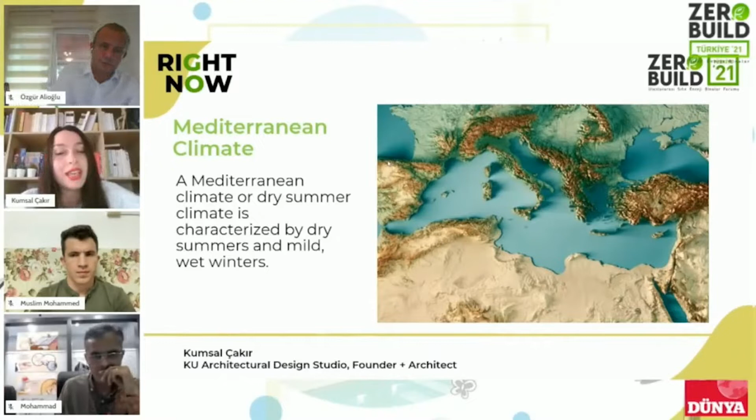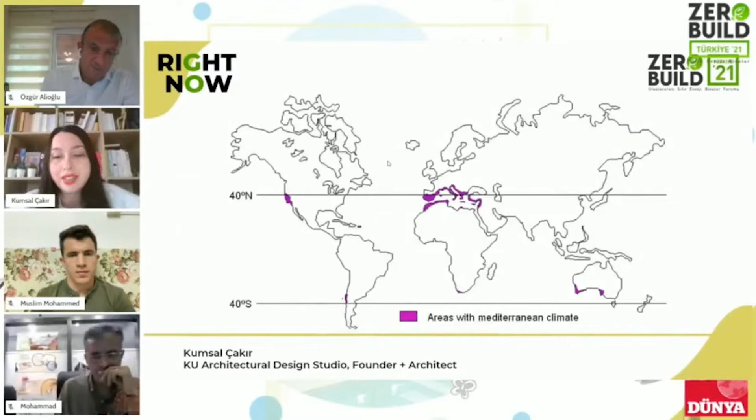Mediterranean climate is characterized by dry summers and mild wet winters. As you can see on the map in the presentation, the Mediterranean climate is located in a limited area compared to the entire world land mass. My first passive house project is ERK House, which is located in Izmir in the Mediterranean climate.

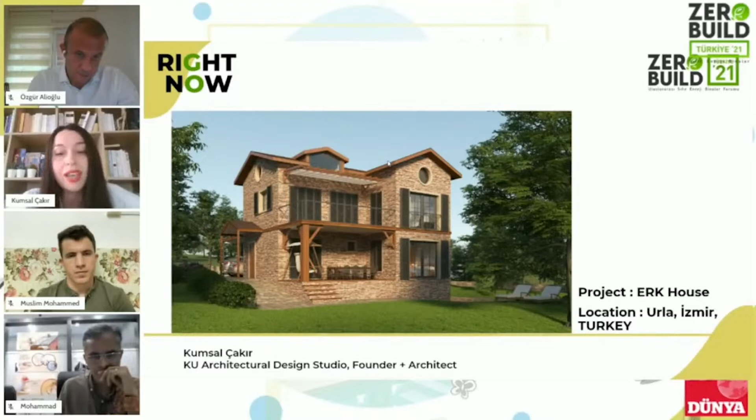It is one of the first projects built as a passive house in Turkey. The ERK House project, in which a family of 5 will live, was actually a project with very minimal needs. You can see the floor plans in the presentation. We have a very compact and practical plan. However, our difference from many passive house projects was meeting the passive house criteria in summer conditions.

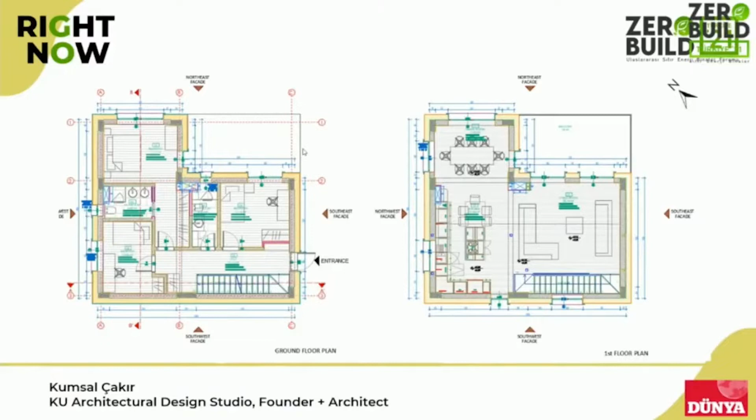I think the Mediterranean climate is one of the most pleasant and non-challenging regions to live in, at least in my personal opinion. Common practice is to try to provide passive house criteria for winter conditions in cold climates, but we made an effort to provide passive house criteria for summer conditions.

As you can see in the presentation, there is a verification segment on the homepage of PHPP, the Passive House Planning Package, which we use in passive house planning. On this page you can follow whether the necessary conditions for passive house are met, and space cooling is optional for passive house, which describes summer conditions. However, if you really want to do environmentally sensitive design in a region such as the Mediterranean climate, it can't be optional, because it's really easy to provide the values required for winter conditions in this region.

But unlike common projects, we made an effort to meet the criteria for summer conditions.

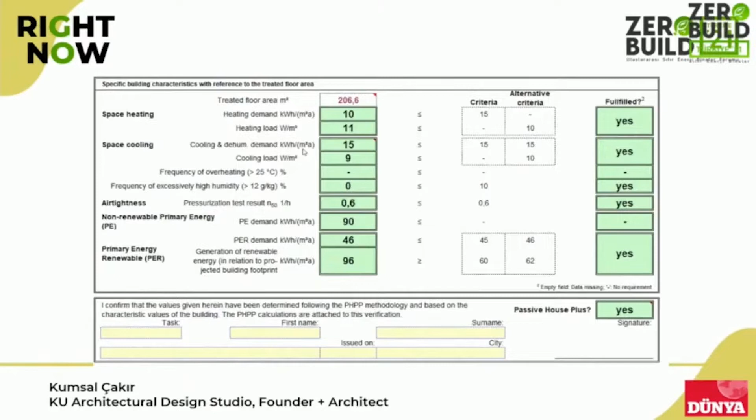The fact that our project is one of the first to be certified in Turkey, and that it's located in the Mediterranean climate, led us to new discoveries about some design decisions. Heat gain in summer and humidity became one of the most important issues for ensuring thermal comfort of the project.

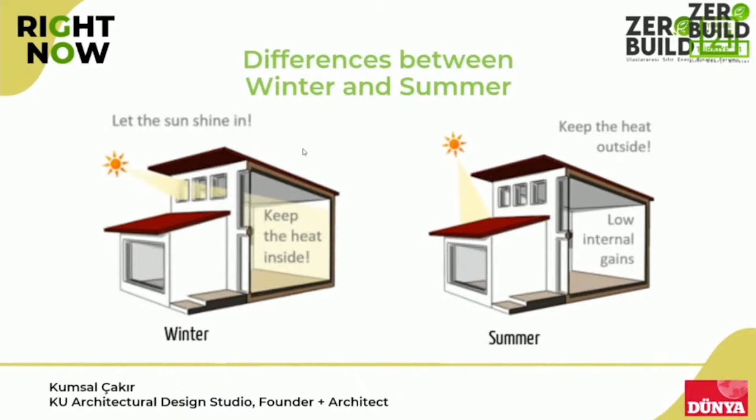For example, even if we wanted to open a skylight in the roof, the calculations we made didn't allow it. We could only make a skylight about 1 square meter, so we decided we didn't need to break the insulation for this. Apart from that, the passive house system didn't limit us in terms of design. This was just an extreme example that really surprised me, about the effect of the roof window.

Although we are in the Mediterranean climate, we applied the 5 basic principles of the passive house system in our project. I think it's been talked about too much in sessions, but let me tell again the 5 basic principles of passive house. First is a very high level of insulation.

We used 24 centimeters of EPS on the walls, but 5 centimeters of XPS on the basement floor, because we need to lose heat from the basement. Of course, we use extremely high performance windows with insulated frames, and we supply an airtight building envelope. We have thermal-bridge-free design, and a mechanical ventilation system with highly efficient heat recovery.

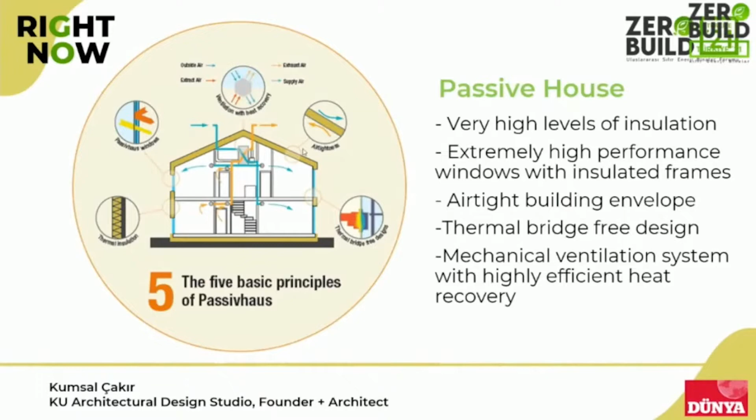While doing our work, we tried to compare all components in terms of price and performance. For this, having a program like PHPP made our work much easier. We didn't act by heart on any material.

Of course, we faced some difficulties in the process. Although passive house is a very clear and simple system, we encountered some problems due to unknowns of the system in newly implemented regions such as Turkey. When we communicated with subcontractors who didn't know about the passive house system, we had difficulty being understood when giving information.

Unfortunately, we received a lot of criticism about why we are dealing with such a thing, especially whether it's worth the effort for a single house. I think this is one of the most challenging parts of the project. The lack of certified local products and our limited options were also factors affecting the process.

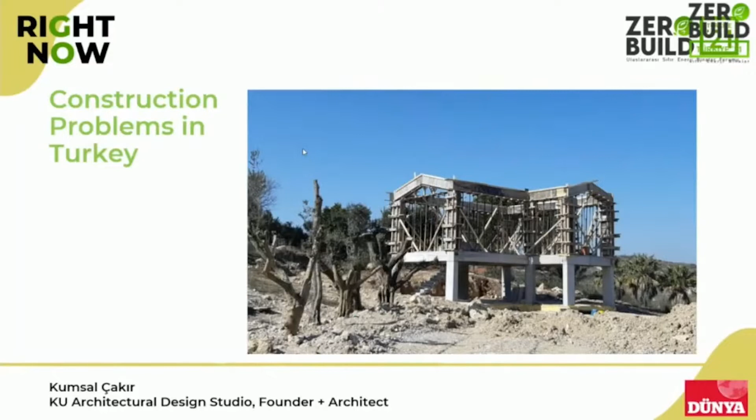We had some misfortunes in implementation here. The fact that it was one of the first projects in Turkey, and that we wanted to test every material, meant we had a hard time getting enough support from the contractor during the process. However, we continued our work even if the process took a little longer than we expected.

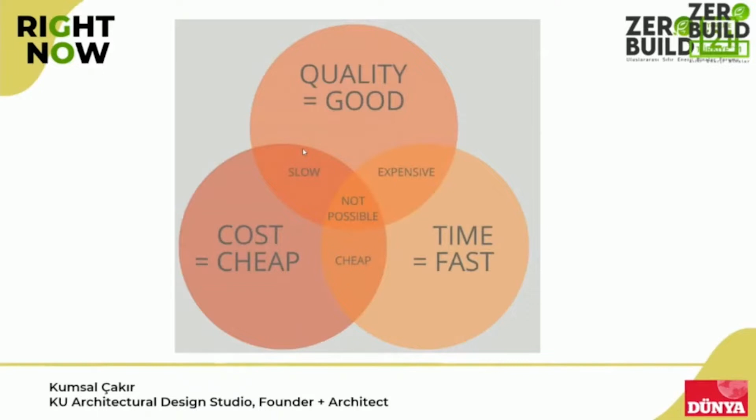Sometimes it's not possible to achieve good design, low cost, and fast completion at the same time, not only in passive house projects but in every project. But I believe we have optimized the project as much as we can.

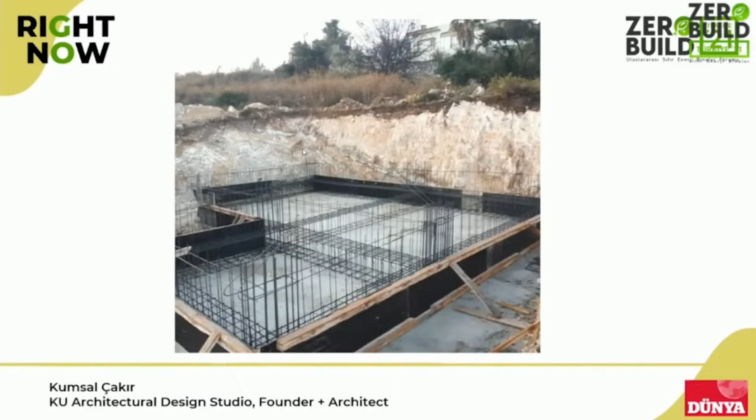You can see some construction photographs from our project site. We still continue construction and some material tests. This is a test from the roof insulation - we are making this with EPS.

This is not rocket science, as is often mentioned in zero build sessions. However, as a society, we need more awareness and education. This should be a process that includes everyone, from the worker to the architect. Then we will see how the passive house system is practical and easy to apply.

As an architect, I see that the only useful contribution I can make to the environment is to take part in passive house projects. I wish these projects would multiply in Turkey and similar countries, and I hope to present you with more project examples from Turkey in the following years.

As good news, I am doing a second passive house project, which has started in Sakarya, Turkey. It's not in the Mediterranean climate, but it's in Turkey. I hope that in Turkey we will have more environment-friendly buildings in the coming years. That's all - thank you for this opportunity.

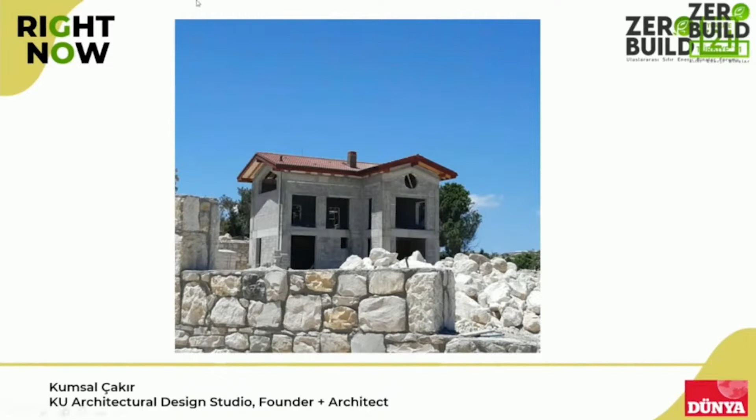Thank you, Kumsal, for this very lovely presentation. It's really good to see examples from Turkey because, as far as I know, except the passive houses done by SEDA, this is maybe the first real private investment in Turkey. So congratulations to you also about this investment.

A little question for you. You said you have started the second passive house project in Sakarya, and you want to present more examples in the future. What is the basic lesson that you took from the first one? What will you carry to the next one, and what will you not carry to the next one?

I think I will not listen to all subcontractors. I will follow my route, because they take your efforts, and sometimes you start to be sad. I think I will just listen to my heart, and the passive house institute.

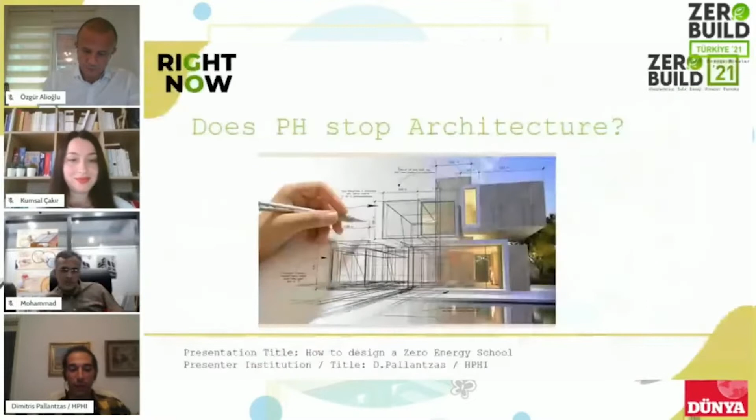This presentation is about how to design a zero energy school and a passive house kindergarten in Athens. But first of all, one very common question we've had over the past years is: does passive house stop architecture? Because it's a common issue, especially among architects, that with a lot of insulation and lack of geometry, a passive house doesn't help architects design and use their imagination.

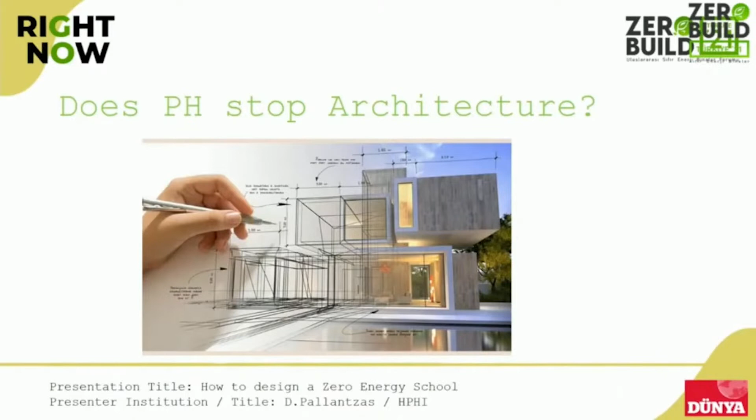Imagine that if a child asks for something, an ice cream, toys, a video game, there's a 90% chance he will get it. In Germany last year, there were two identical schools, one passive house and one not passive house. After some months, the indoor air quality and temperature inside the passive house school was 100% better than the conventional one, even in Germany with a lot of insulation. So the kids were actually begging their parents to let them go to the other school.

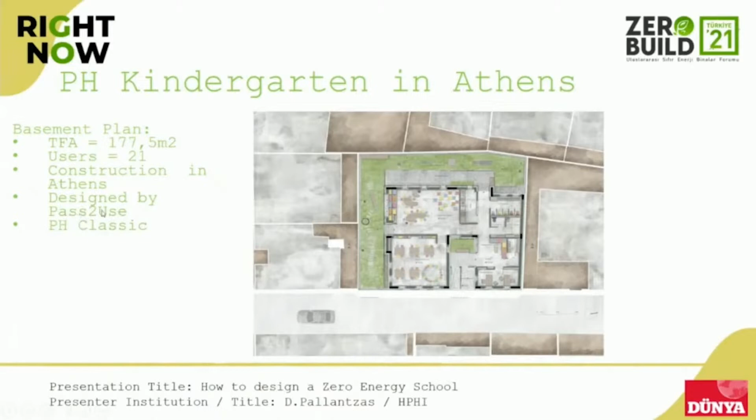So this is the kindergarten. It is a very small building with 177 square meters of floor area. The users will be 21, together with the professors. It will be constructed in Athens. It was designed by the team Pass2Use, a team of 6 students who did an amazing job. It will be Passive House Classic, the category. It is Passive House Classic, Plus, and Premium.

It is inside the neighborhood, right in the center of Moschato Tavros, a neighborhood in Athens, in the center of Athens, which doesn't help in terms of solar gains because there are other high tall buildings nearby. But in terms of the heat island effect, it is highly affected.

Thankfully, in Greece, the kids have 3 months of vacation during the summer, so we don't need a huge cooling system.

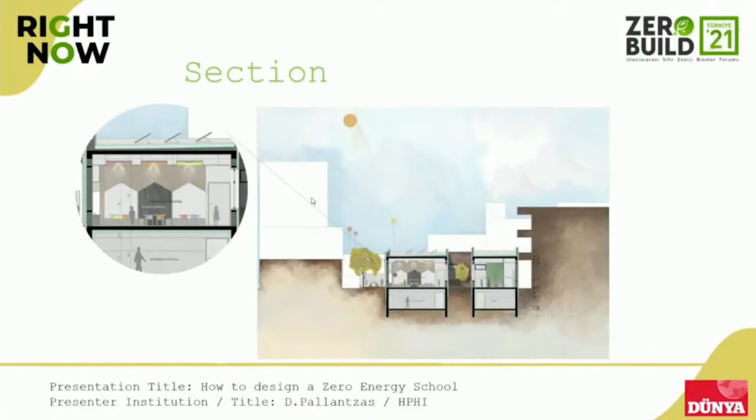Here is one more section, as you can see. This is the PHPP, the energy balance calculation, in which we have for thermal envelope: U walls 0.215, U roof 0.133, U floor 0.278, and an average U window of 0.91 watt per square meter Kelvin.

Normally, a key in the design of such buildings in Greece or in the Mediterranean is that sometimes you don't need to insulate the basement a lot, because you will use the basement or the ground as a sink from which the heat will go out, and we will have free cooling.

In this particular PHPP, the students designed a good insulation in the floor because, as we discussed, the building will not be used mainly during the summer.

So for the HVAC systems, we will have 2 units designed with an airflow rate of 470 cubic meters per hour, heating and cooling with a heat pump of 4 kilowatts, and domestic hot water with solar thermal.

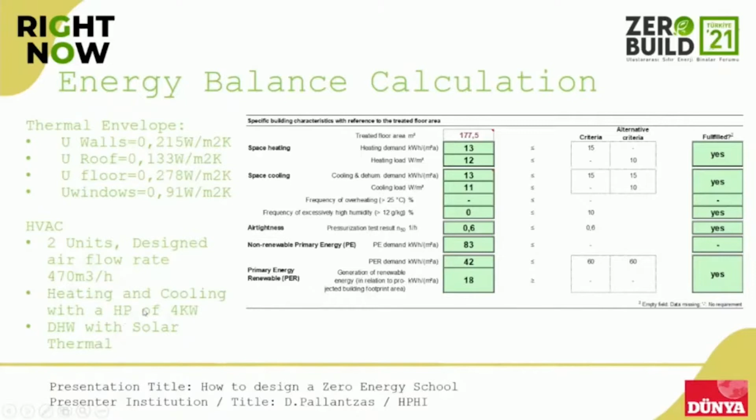So this is the design of the mechanical ventilation with heat recovery. We have some rooms from which we will also supply and extract in order to have transfer air all over the building.

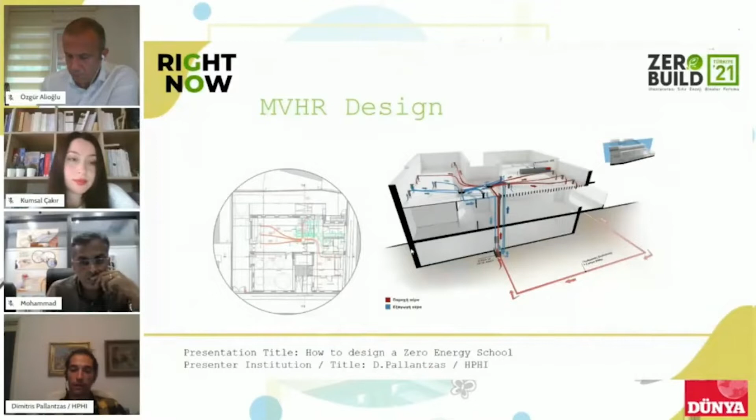I remind you that we need supply in the usage rooms, and we extract from bathrooms, kitchens, etc. This kindergarten will not have a very big kitchen because it's small. It will have only one small cafe with some refreshments and snacks for the kids.

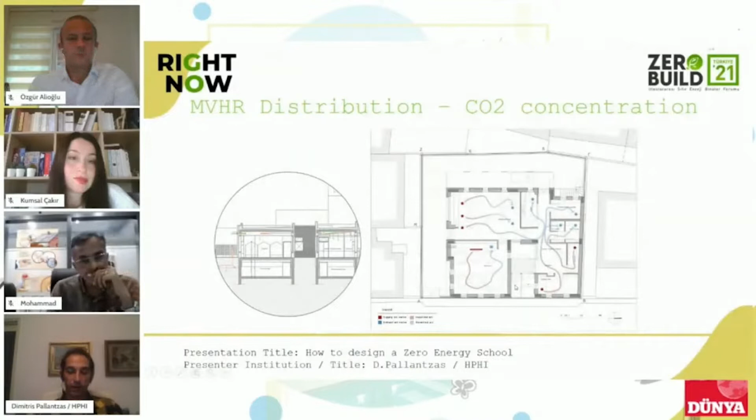And this is how the air will transfer inside our building. It is very, very important, the concentration of CO2, because normally schools and kindergartens, especially in winter, have more than 2,000 or 3,000 ppm. We need to keep this number under 1,000 in a passive house.

With this particular design, we will achieve it. And this is very, very important for the health of the kids, for the concentration of everyone, and for the indoor air quality.

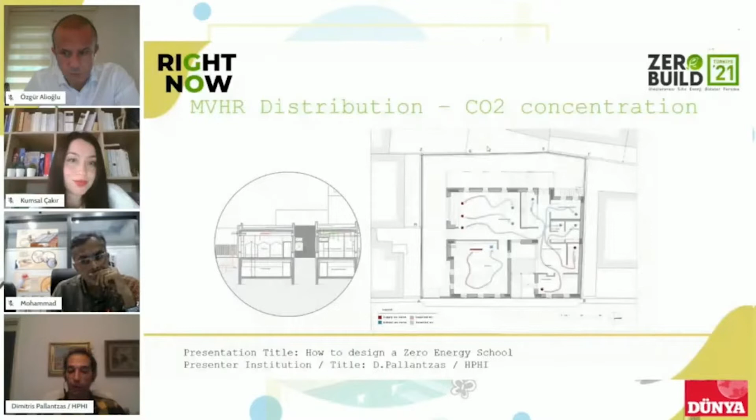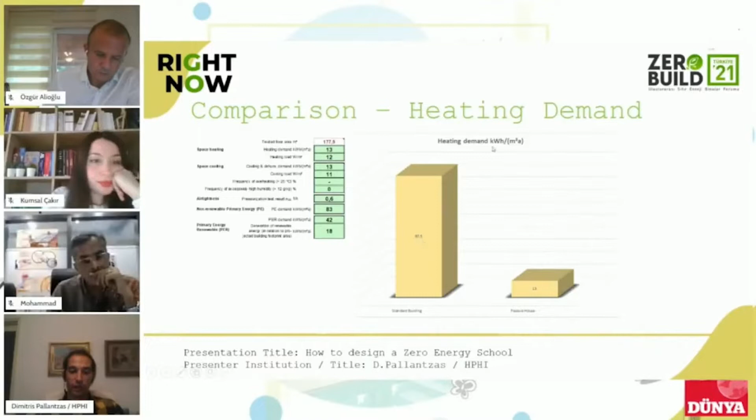So some slides about comparison with a standard building and a passive house. Our regulation gives us this particular result: a heating demand of 97.5 kilowatt hours per square meter per year, and we are at 13. Cooling demand for a standard building will be 51.3, and we again have 13.1 kilowatt hours per square meter.

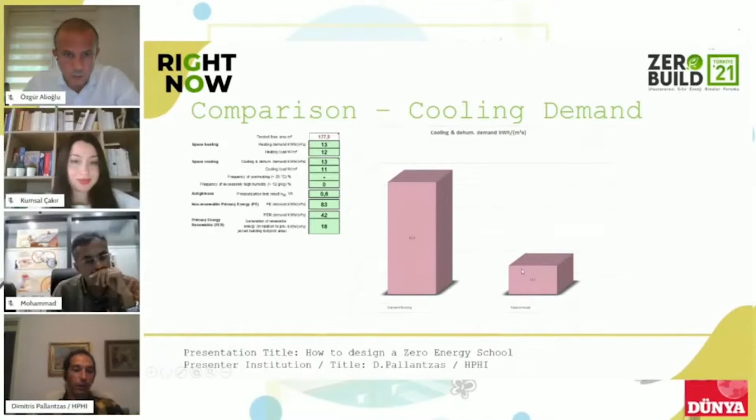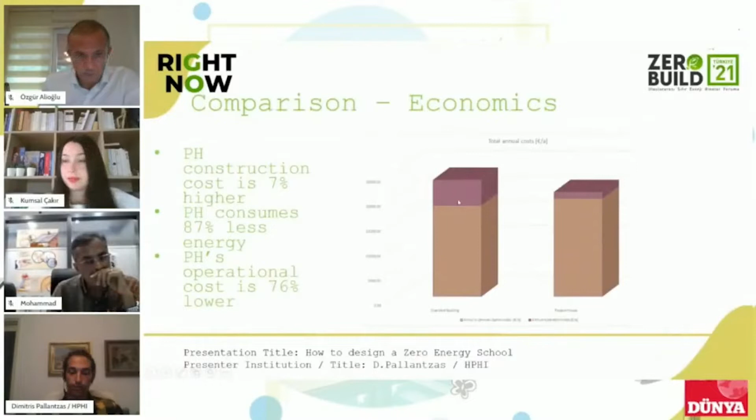So it's 5 times less and 10 times less than a conventional one. About economics for this particular building, passive house construction is 7% higher and consumes 87% less energy. Moreover, passive house operational cost is 76% lower, so the total annual cost for a standard building will be higher due to the operational cost, as you can see.

Last but not least, indoor quality. I talked a lot about the air conditions and the indoor quality of a building, because even in Greece a lot of schools are suffering from energy poverty, and we see that every single winter kids are complaining, parents are complaining. You can imagine that in a country with a very low delta theta temperature difference, it's crazy to not be able to warm a classroom with 20 students and so many internal gains.

Thank you, Dimitris, for the presentation. Your presentation and your experiences are very important for us, because as Greece and the Greek Association, you are ahead of us. Your experiences are really putting a light in front of our way.

Just a question to you. Sure there will be more questions at the end of the session, but how did you manage to convince the state or the government to start passive house schools?

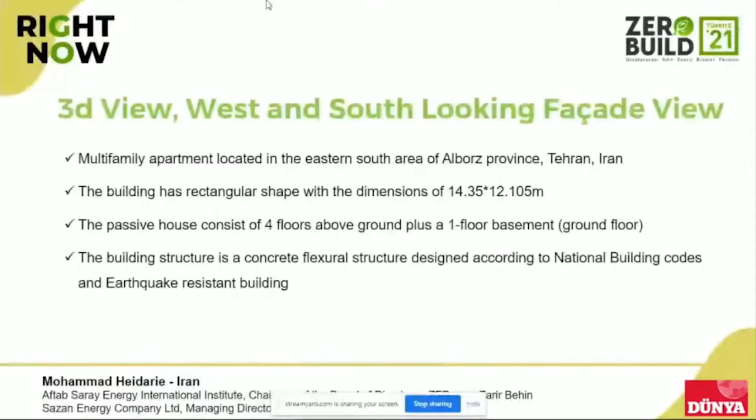This is going to be an example, so I decided to put a PV system on the roof and also on the facade. This is the architectural design. This is the west facade view, and this is the south facade view.

The building is located in a warm climate zone, and we have a problem during summer with power cutoffs because of cooling. Everybody uses cooling systems to cool down the houses, using electricity, and in wintertime they use gas heating. We also have a gas cutoff during the wintertime.

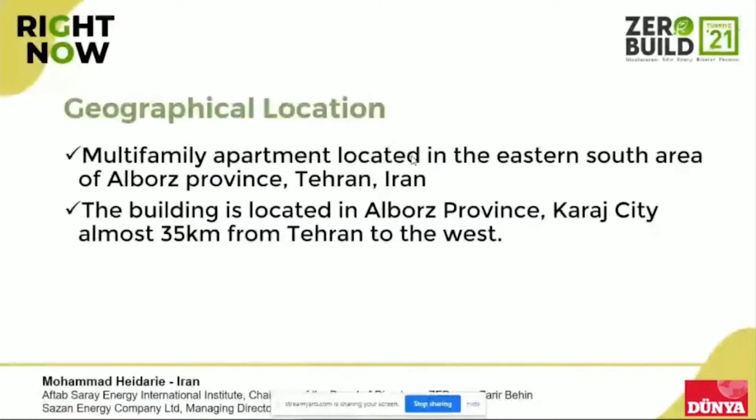According to the statistics, the building industry uses almost 40% of the energy countrywide. The building location is shown here. It's a kind of rectangular shape.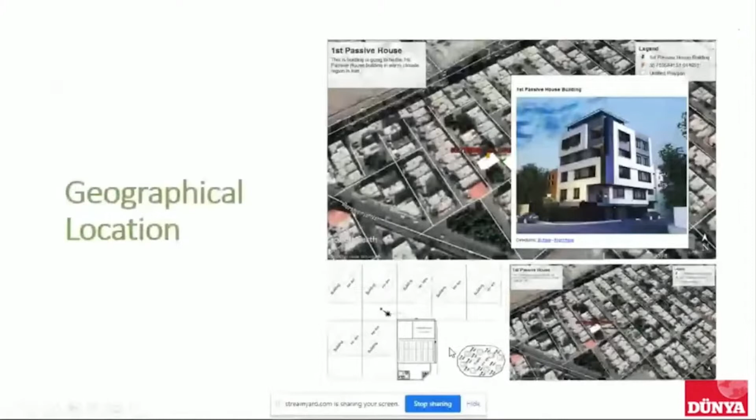To start with this passive house design, we already contacted the Passive House Institute, and they were willing to join us as a certifier directly, because they said it would be the first passive house in Iran. But due to some issues, we didn't launch this certification process. I'll summarize at the end of my presentation why we didn't go for certification.

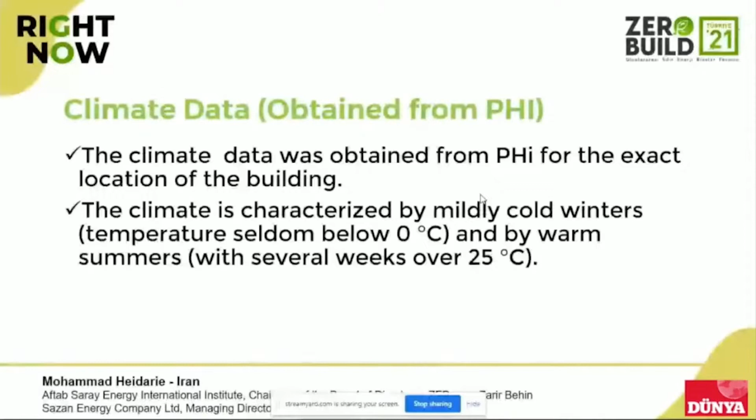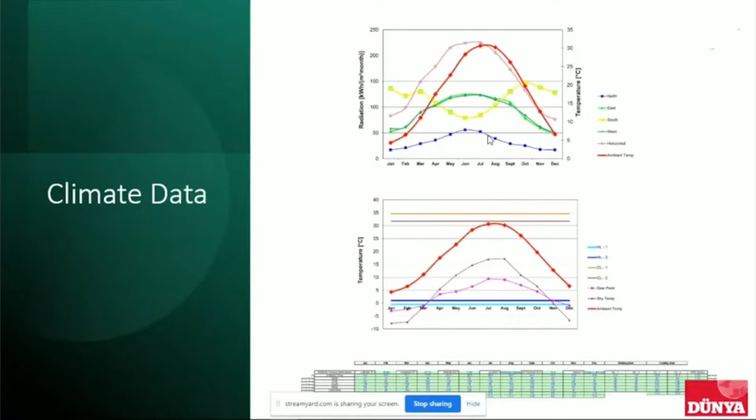For the climate data, we used the PHI, and they provided the verified and accredited climate data for the building location. You can see these graphs which come from the PHI. These are the climate data we used in the PHPP analysis, and according to this data, the climate zone is almost warm in this building location.

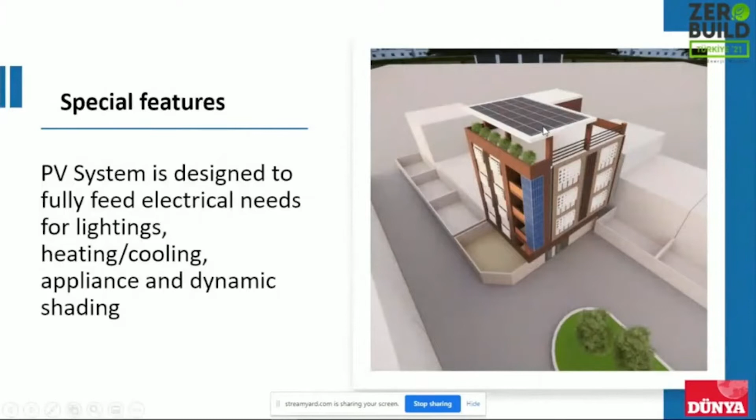This 3D view shows how the building looks, with the roof-mounted PV system and also on the facade. This is the application of the building, which is open on both sides, east and south, and there are also neighboring buildings which are one-floor villas or dwelling buildings.

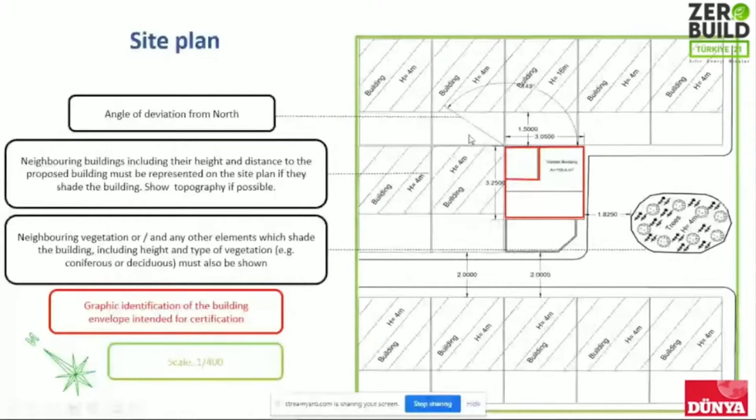To start the design, we used Design PH, and in Design PH we got a sample climate data from one of the Iranian cities available in the Design PH database. But in order to come up with the preliminary design, Design PH is a good tool.

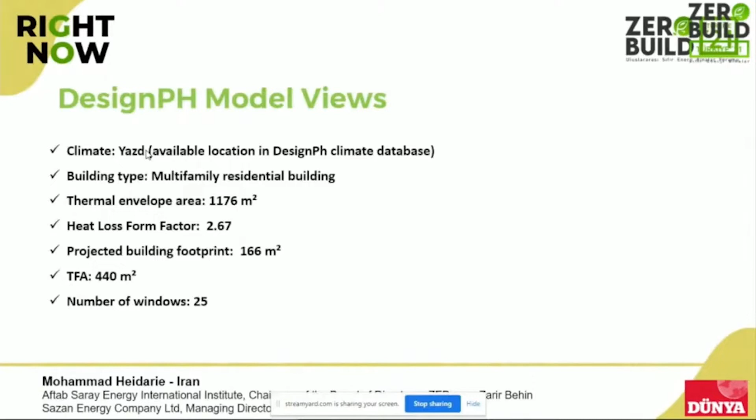You can apply all the scenarios for the insulation, also for... maybe we can continue when he's back with us.

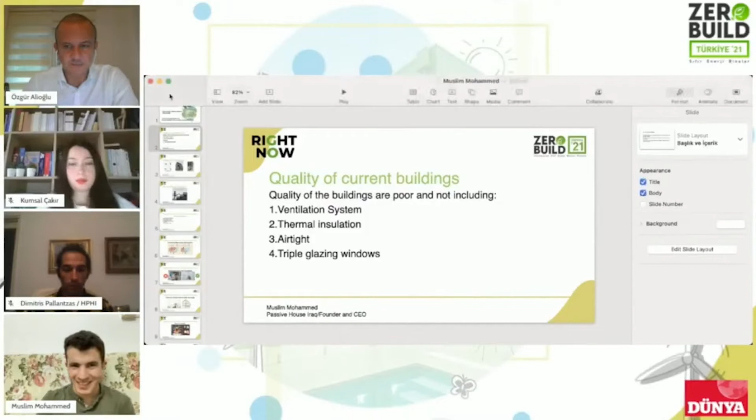I've got to share my screen. Just let me... window, yes. I think you can't see my... We can see your presentation. Yeah, just let me make it full screen. I'm sorry, now it's good, you can see it in full screen. Exactly, please.

And thanks again for this opportunity. Today I'll try to explain how to build a passive house in poor societies. We know that building a passive house in high-quality societies, I think, is not difficult. For example, it's not difficult to build a passive house in the center of Europe, in a country like Germany or Austria, or even in high-quality neighboring countries. For example, if you want to build a passive house in Turkey or other countries, I think this will be easier. But how can we build a passive house in a poor society?

Poor means a lack of material, and it's also too difficult to reach agreement with clients, because we know that passive house, I think, is today the highest standard for building energy efficiency in buildings.

Before you start building a passive house in any society, you need to investigate the current quality of the buildings. If current buildings have good quality, it's easier to reach passive house standard. But if current buildings have very poor quality, you need to work harder to reach passive house. This presentation is prepared based on the society of Iraq.

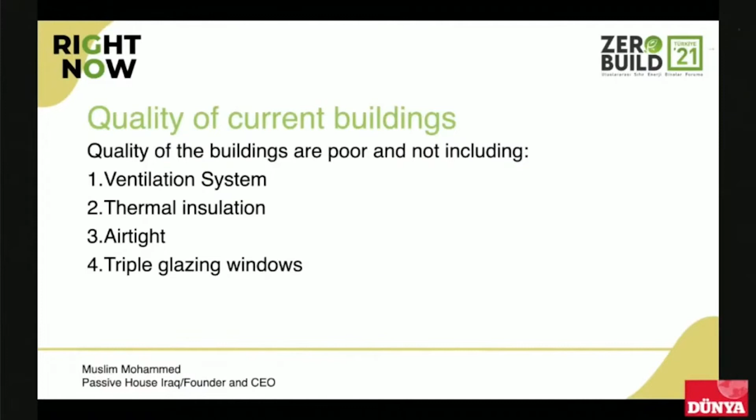Also, about 85% of windows used here are not triple glazing windows. This is the current quality of buildings.

If you have information about passive house, you can see how difficult the way will be to build one. Because if you're living in a society where people use, for example, 5 centimeters of insulation, it will be much easier to reach or improve toward passive house standard.

If people already have the idea that using thermal insulation is good for the building, for saving energy, and for reducing the cost of electricity, gas, or oil, then the way forward will be more clear, and you go with fewer steps to reach passive house.

As I mentioned, we have no ventilation systems, and this is a real image of most buildings here. People use concrete block, and on the exterior it's just finished with cement-sand render, nothing more. On the inside, they just use wet gypsum. This is the quality of the external wall.

And do you know the U-value of those walls? It's so high, and it loses a lot of energy.

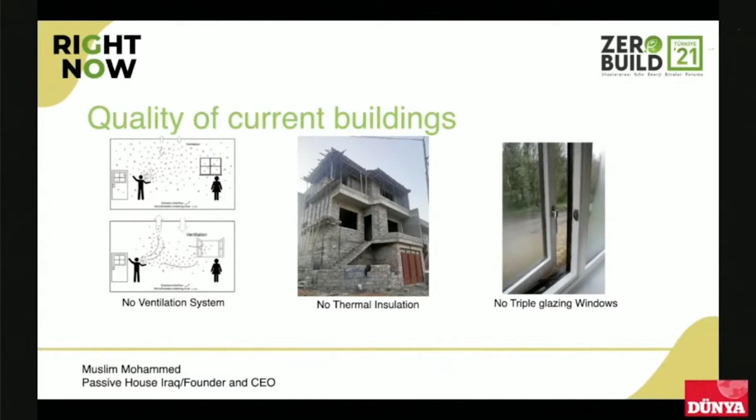Also, as I said, the windows here are not triple glazing, most of them are double glazing windows. The thermal break of the window profile is nearly 15 millimeters, while passive house windows have nearly 50 millimeters of thermal break. That's really much lower quality than passive house standard.

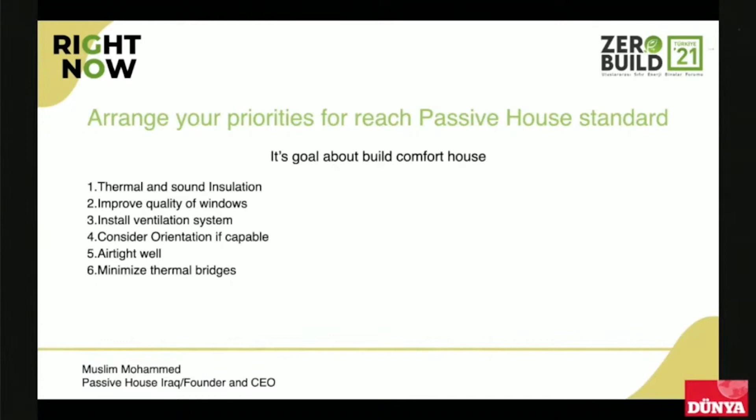Because of the high cost difference between conventional house and passive house, in the first step it will be very difficult to build a passive house. And when you want to change people's minds, if you are popular, for example, on TV shows or in academic centers, you've got to highlight the comfort outcomes of energy efficient building.

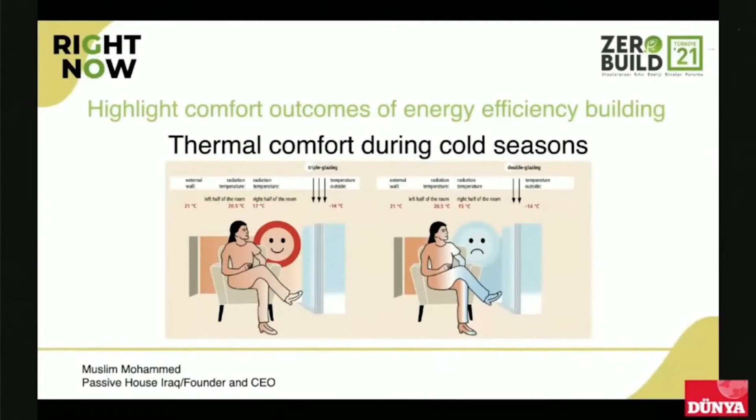People will ask you: what do we achieve if we build houses in an energy efficient way? For example, you can say during living in this building, you will have great thermal comfort. During winter it's warm, and during summer it's cool. Also you can say during summer the inside of your building is cool.

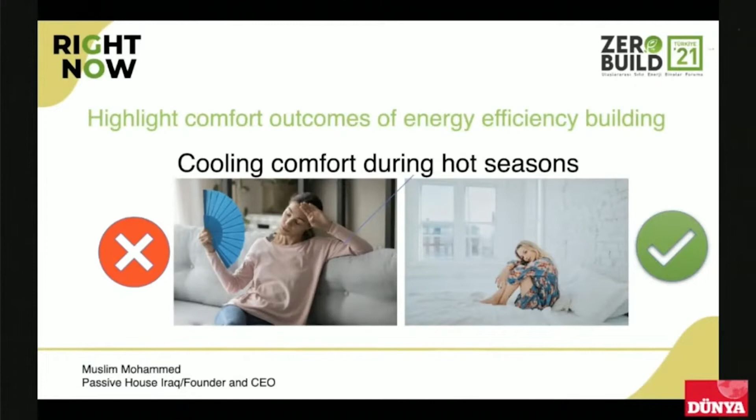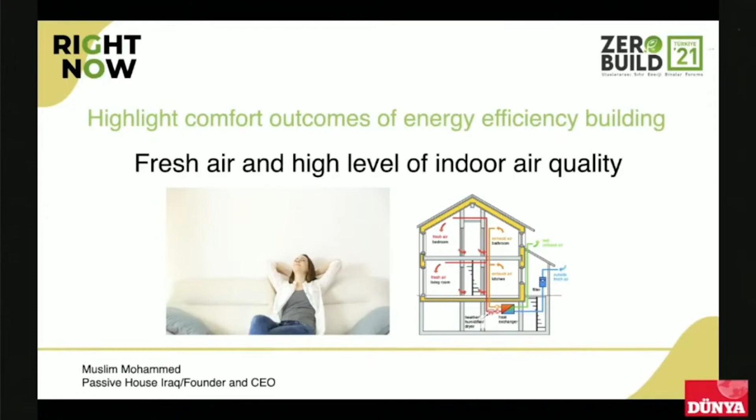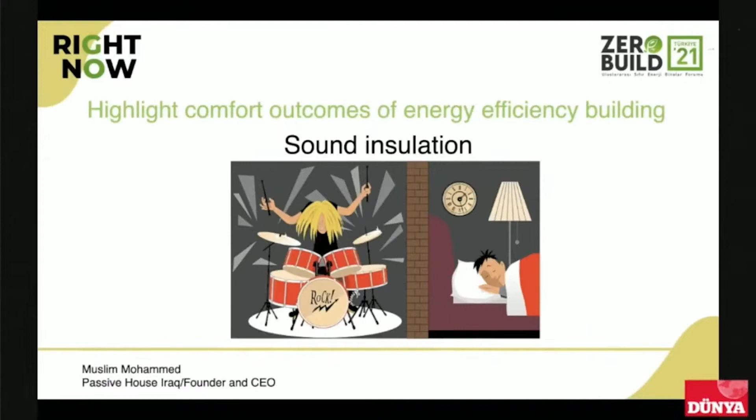Also you can say you have good fresh air and you will not need to open windows to exchange air. And also you can say your building will be sound insulated, because in most of our projected buildings we use rock wool or glass wool. Besides providing thermal insulation, you will achieve sound insulation, and you can sleep very well, or stay at home without any noise.

What is a low energy building? The client reaches agreement with you to insulate just 10 centimeters or 5 centimeters for external wall, 10 centimeters for the roof, and the people agree with you to add triple glazing windows, but not the passive house thermal break, because we have experience that it will be very, very expensive.

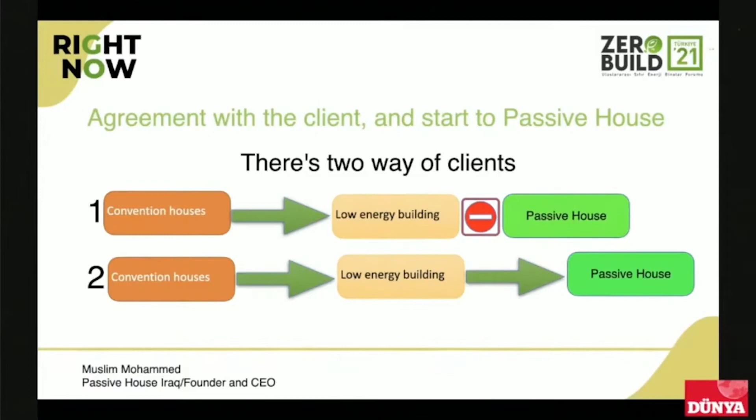Unfortunately poor people cannot afford passive houses. I think only rich people can, because the cost of passive houses will be nearly 30 or 40% more than conventional houses. You may be surprised that it's so high, but it's true, because if you compare conventional houses here in Iraq with other countries like Germany, the quality of conventional houses here is very, very low. So the difference between conventional and passive house is very high.

Regarding concerns about building passive houses in poor societies: the first is lack of materials from local companies. Trust me, more than 80% of passive house components we order from abroad, from Turkey, Germany, Switzerland, and other countries. It means passive house components are not available locally.

Another concern is transferring materials from abroad, which adds extra cost for insulation. And another concern is the high cost of construction compared with conventional houses.

It's real. When I meet any client, 100% of clients want to build a passive house, but maybe 70% of the time we lose this opportunity due to high cost. The client agrees on every term with you, but when they see the cost is very high, they cannot provide it due to the economic crisis here.

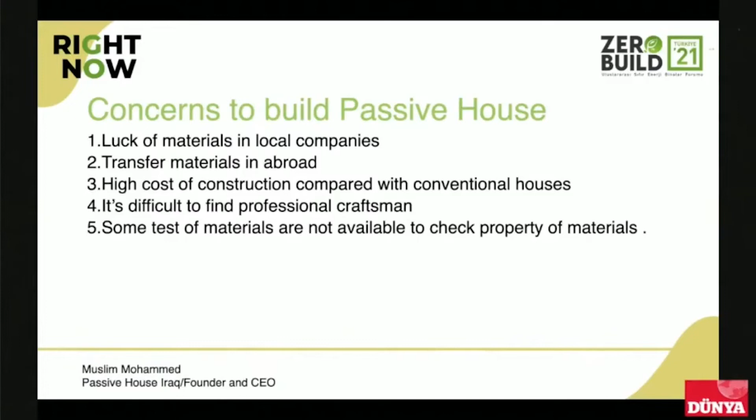These are all 5 points from my real life - I experienced all of them. I took material, for example brick, and traveled from Sulaymaniyah to Baghdad, nearly 500 kilometers, just to test one material. And in the very beginning I worked like a worker to train staff on how to install insulation properly.

Until today, we built only one passive house project following 100% international passive house standards, and we built nearly 30 low energy building projects. We have 2 other passive house projects in process. You can see that during 3 years we built only 3 passive houses, but more than 30 different low energy projects. So this is the reason why building passive houses in poor societies is very, very difficult.

From here until the end, the last slide, I will show you some pictures already built in some of our projects.

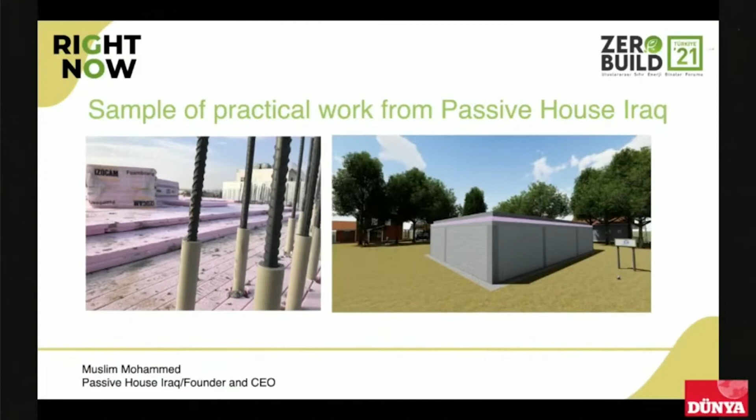In this picture on the left, you see we have no thermal break here, and I tried to make a beam above this insulation. To fix it and minimize the thermal bridge, I covered these steel bars with insulation that goes through the insulation to minimize the thermal bridge. This video shows that.

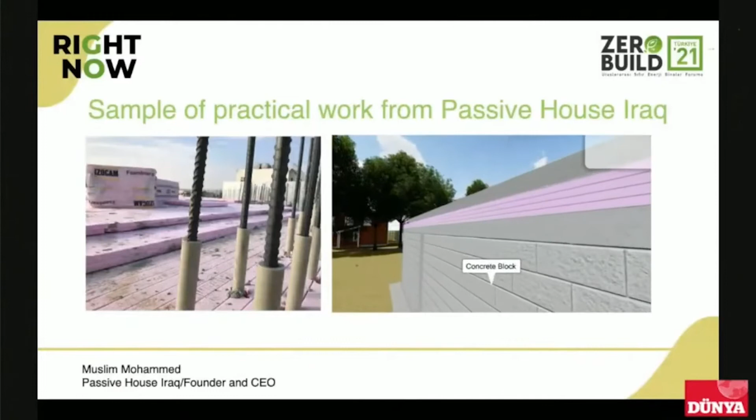This is the first project we started. This is the passive house, as I said, the first one. It has finished construction, and we will certify it soon with the Passive House Institute, inshallah.

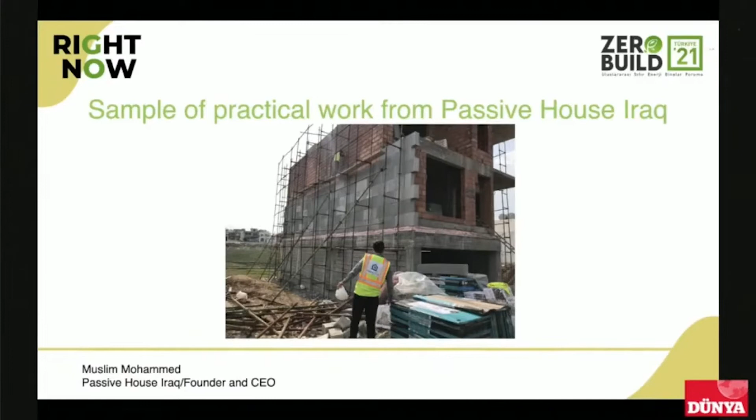This is according to the climate data of that region - we should use more than 25 centimeters of insulation. To stay on the safe side, we used 30 centimeters. This is the first time in Iraqi history that 30 centimeter insulation has been used in a building roof.

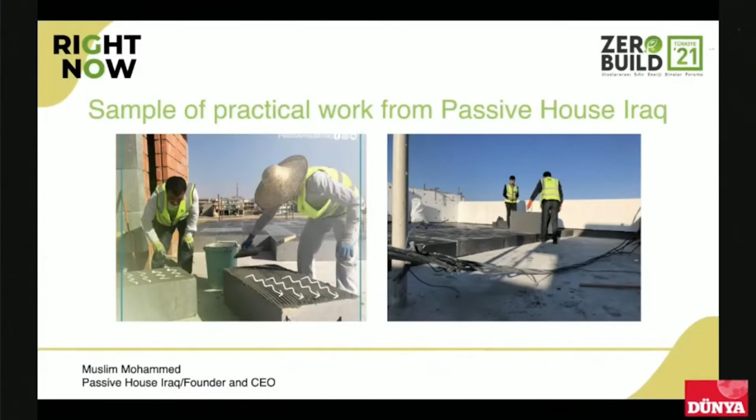As I mentioned in the beginning, it's really too difficult to say the client should use all components of passive house. So the reason why in most of our projects we tried installing only thermal insulation. I know unfortunately we cannot call it a passive house project, because passive house projects should include all components, but we proudly say that if we go back three years, most people didn't know what thermal insulation was and most people didn't use insulation.

Now today, when people want to build new houses, they come to our office. They want insulation to save energy and also to be comfortable. That point is very important: the feedback from people is excellent. That feedback describes our work more than our own description before starting the work. The feedback is better than what we expected.

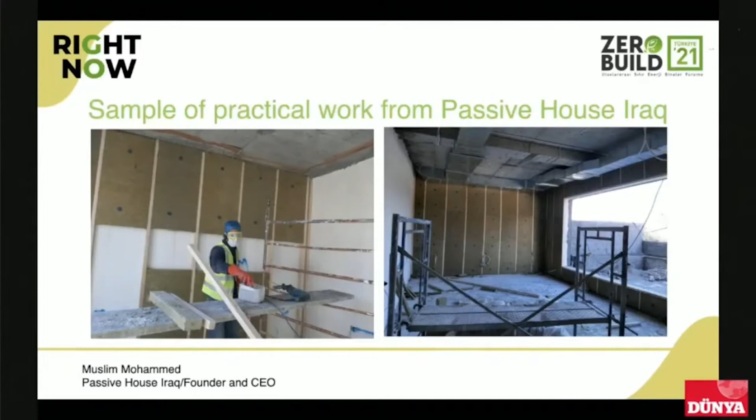As I said in the beginning, step by step you should reach passive house. Today we cannot refuse people's offers for insulation. We cannot say if you don't use ventilation, windows, airtightness and insulation, we won't work for you. Step by step we go toward passive house. Maybe in the next 10 years it will be very easy for people to want to build passive houses. Now we are in the process of changing the thinking and minds of people.

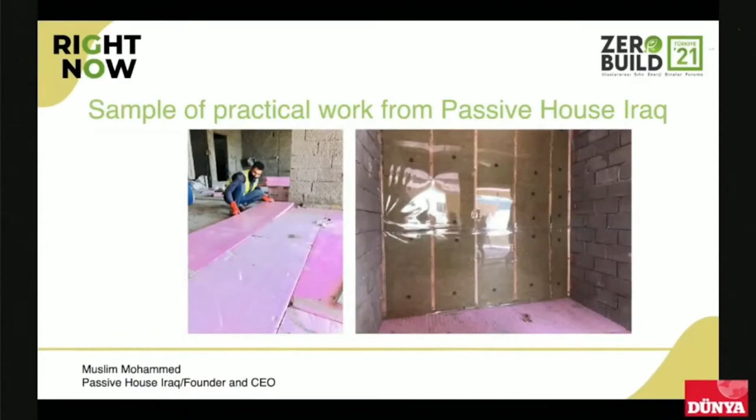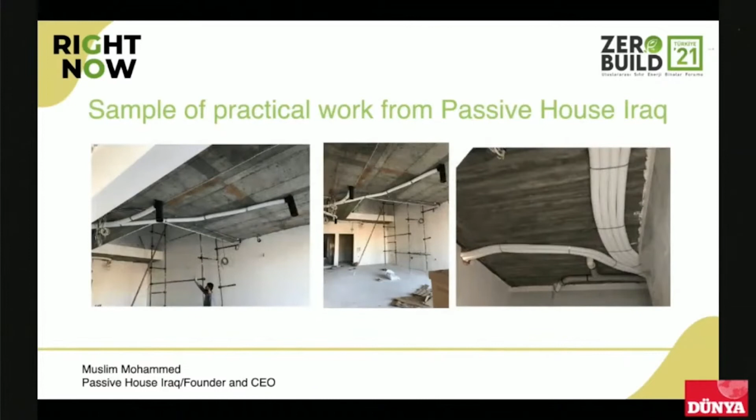This is two different other projects here. This is the left one, installing 10 centimeters of insulation for the ground floor. This is the right one also. This is the real image of the first passive house building, and this is the ventilation system we have already installed.

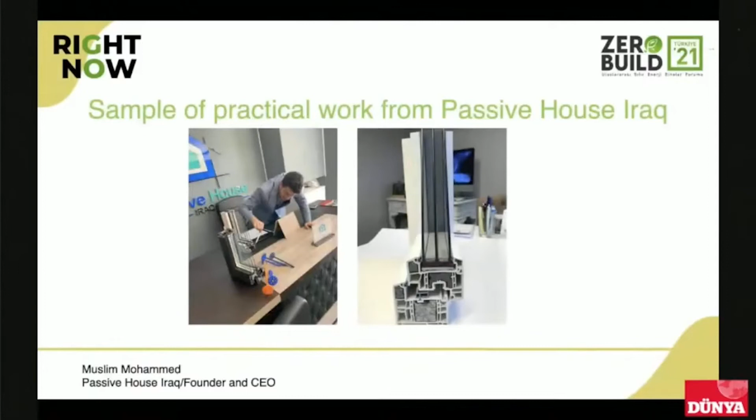In this picture, I was in the process of explaining things to students who came to our office. They wanted to get more knowledge about Passive House. Thanks for providing this opportunity to me, and I am sorry if I extended my presentation. Thanks to everyone.

Thank you, Muslim, for your presentation. It was very nice to hear what's happening around Turkey in our neighborhood. Really, congratulations for your effort. We felt that you are really struggling with that.

So before we pass to the questions, just a quick question from my side. Are you in contact with some local manufacturers or local investors to do something about that? Do you have any contacts like that?

Yeah, we have already contacted some investors and some manufacturers, for example, for producing passive house components. But they mentioned that for trade it will be difficult for them to produce passive house components. However, there is some investment—for example, in Erbil there are more than 30 very huge projects. I don't want to say too much, but maybe in the upcoming months we will make a contract with some investor to build, for example, a city to passive house standard.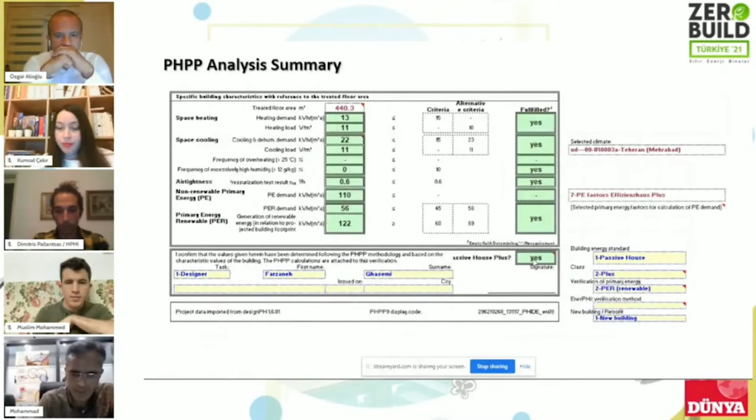So, one of the most important issues in this construction was the thermal bridges. Based on the locations details which has been shown here, we came up with 5 locations for the thermal bridges, and we calculated all the thermal bridges with Flixo.

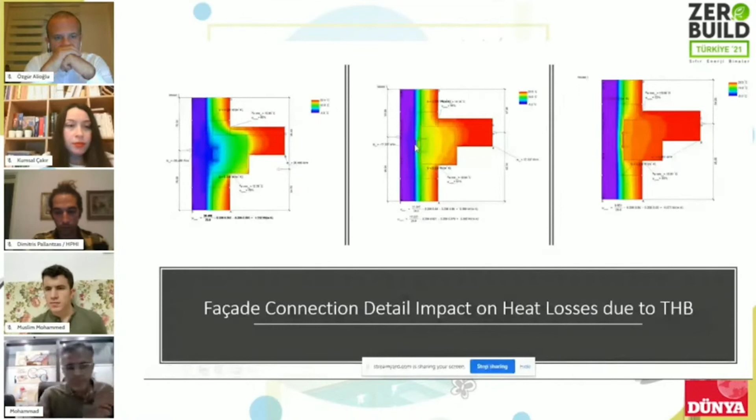Also one of the most important challenges for the thermal bridges was the thermal bridge free construction system for the facade, because we use the dry facade, so how to install it as a thermal bridge free construction system. We use the thermal break in between the plate here from the facade into the AAC bricks behind the insulation. So we came up with the analysis, and we came up with a good solution for that.

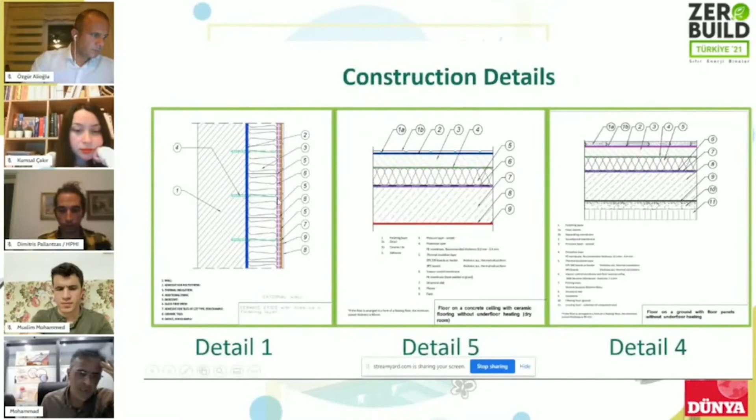These are the construction system which has been shown here. We actually use the insulation with the AAC bricks with this thermal bridge free bolt connection system for the envelope and also for the parapet.

And for the window system, we use this insulation which is connected to the window, and the window is connected to the insulation layer to have a continuous insulation layer on the envelope of the building.

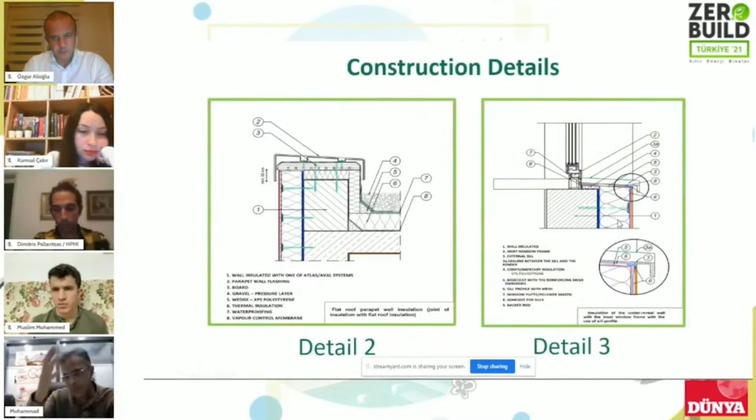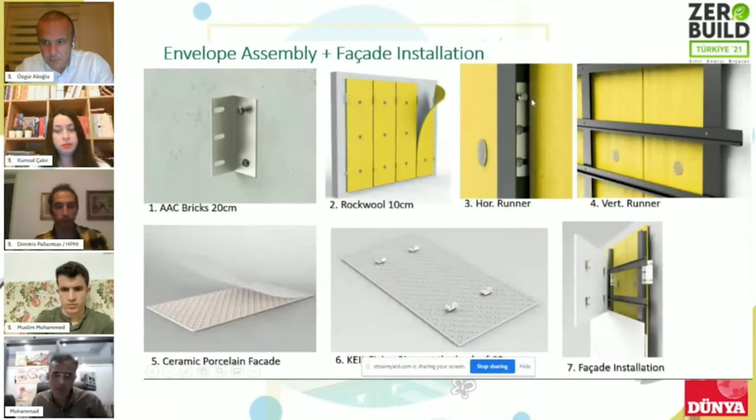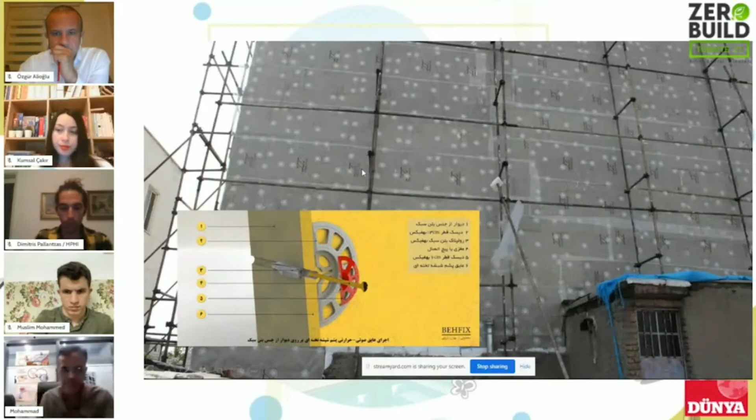And these are the pictures from the insulation installation. This is the rock wool with the fiberglass mesh on top of that to be able to have a plaster on top of this insulation system. These are the plaster which has been applied.

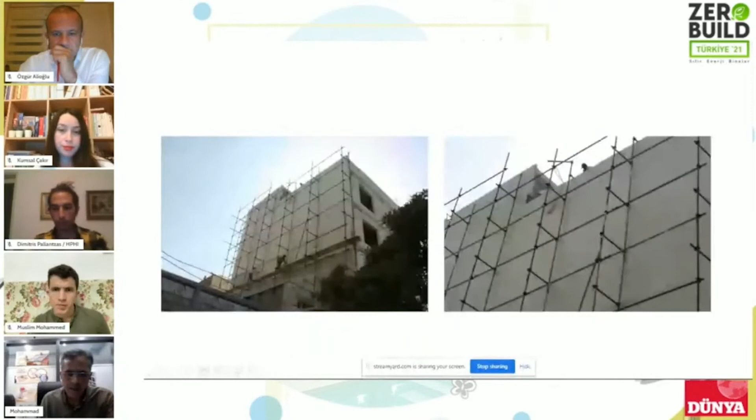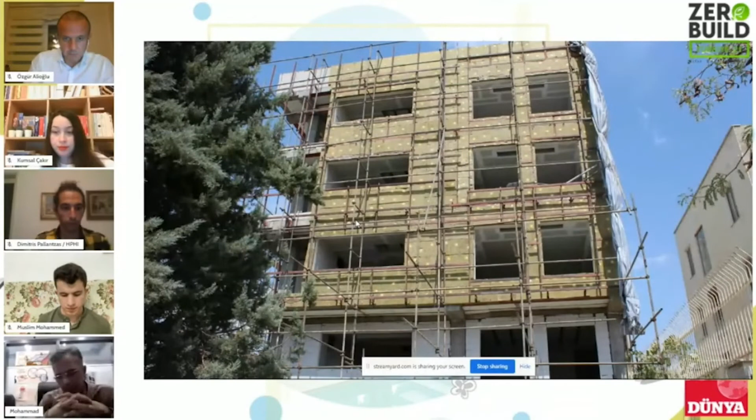And this is the insulation on the facade frame, which is supporting the structure for the facade - the final layer. This porcelain is connected through the insulation into the AAC bricks via the thermal bridge. These are the construction, going - has not been finished yet.

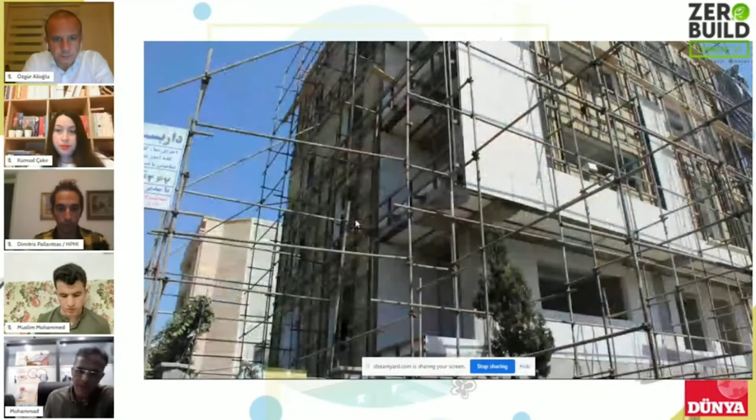You can see the pictures from both sides. And as I mentioned in the beginning of the presentation, we are going to have a PV system, roof-mounted PV system. We have analyzed this roof-mounted system, and then we came up with a 15.7 kilowatt peak. The PV generation output of the system will be able to supply the energy need of the building itself, and also be able to export to the grid.

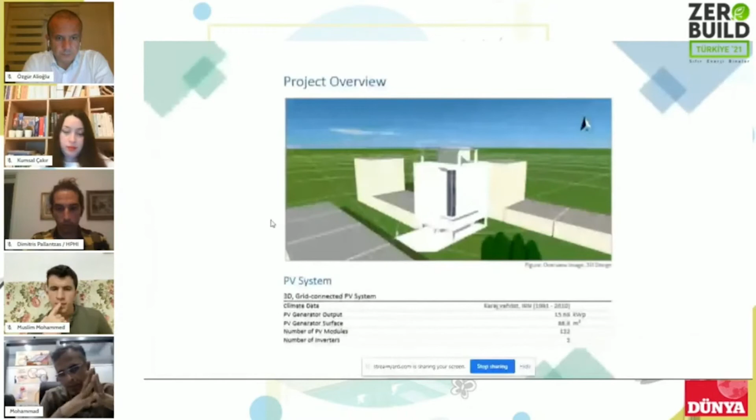But this has not been installed yet. As soon as we finish the building itself, this will be connected on top of the roof with special details to have a thermal bridge free connection to the roof. And we analyzed this PV system by PV Sol. There's some pictures from the PV Sol.

What I would like to emphasize at the end of my presentation, we were not able to go for the certification process through this PHI, because PHI are very interested to get this project into this certification process because they say this is going to be a role model.

But due to some problems which I investigated during the construction, during the design, and during the investigation from the local markets, we don't have this air blower door test facility. So it's impossible to provide air tightness measurements, one of the criteria for the Passive House Institute. But I'm trying to get this from Turkey or from Dubai, it's in process.

And also the window - I contacted ZEBesco, Yasemin. She connected me to window manufacturers in Turkey, and they sent me samples from windows with verified U values, because we need a window with 0.8 watt per square meter Kelvin U value. We do have a PVC window, aluminum thermal break window, but we don't have documentation to get the right U value and incorporate it into the passive house PHPP analysis.

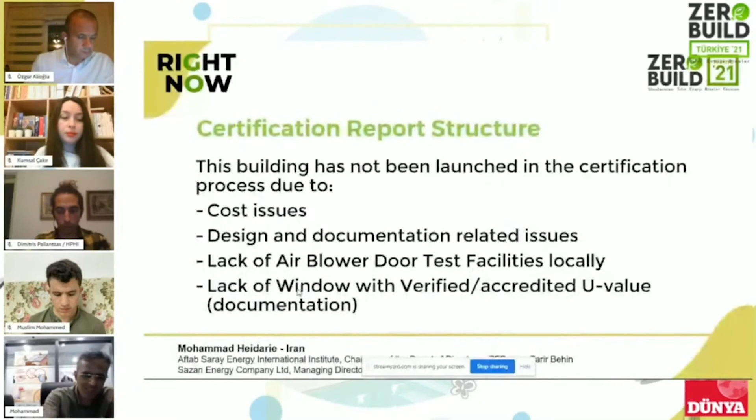We have actually a problem with power cuts and gas cuts all over the year. So they understand the problem, and according to our building - this is an example we shared with them - they are very happy to start using this knowledge for public buildings and also private buildings. We are at the beginning, but we need ZEBesco and other people in the vicinity of Iran to get this job done in the future. And I believe in the future we will have good demand from the building sector internally.

But I believe you might have a lot of questions in the presentation because the building is not finished yet. But if I finish this building, I will provide a complete presentation to ZEBesco, and you can share it with the other people in this session. So thank you very much for providing this good session, and I wish you all success.

Thank you very much, Mohammed, for the presentation. Again, it is very interesting to see the studies in Iran also. Just a question from my side to you - I hope you can hear me well. I have seen that you are using stone wool in the exterior wall insulation, although the buildings are not that high, it's a 3-floor building. Why do you prefer to use stone wool and not EPS or XPS, please?

Yeah, it's a good question. Before I started going for rock wool or stone wool, I tried other insulation like EPS, XPS, but unfortunately they are flammable. We don't have an unflammable XPS or EPS in Iran, and it's going to be a problem. And also it's toxic. I tried, and then they put a flame to it - I got samples from local manufacturers, so it's quite expensive and also flammable. That's why I decided to go for rock wool. There is a company which has produced rock wool for almost 50 years in Iran, so I also got good documentation for the U value from this company. That's why I went for rock wool.